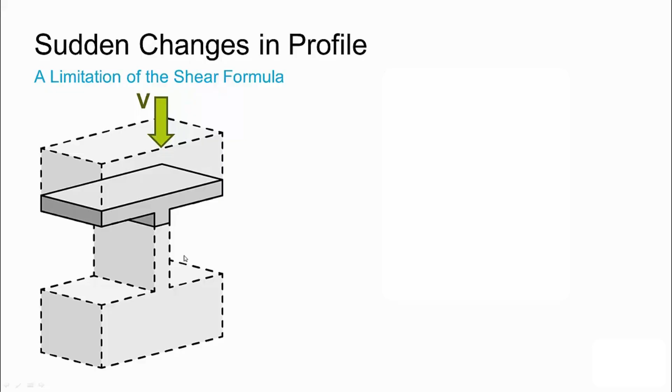If I section away a portion of the flange and a portion of the web and applied our shear formula, we would get that there has to be a uniform shear stress acting in the flange and a uniform shear stress over the small area of the web.

Now the problem occurs when these two faces get close together as we approach this sudden transition. At that sudden transition, this uniform stress distribution here has to change into this more compact, higher magnitude acting over a smaller area. And we know that's not going to happen in some sort of sudden jump. It's not going to just suddenly change from one to the other.

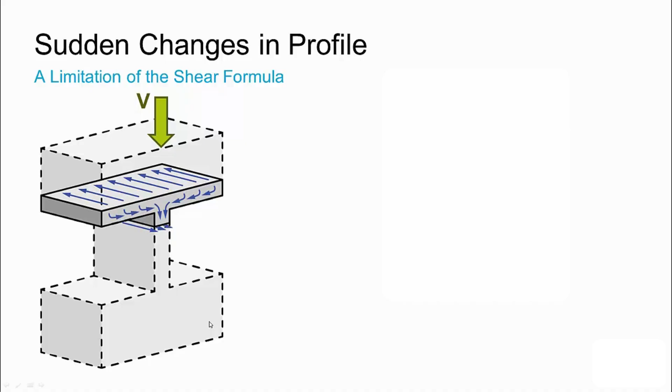Really, stresses tend to flow through a structure, and that boundary condition will influence the stress distribution, and the stresses will begin to flow into that web. This kind of disruption of the stress field that we predict with our equations that assume sort of a well-distributed type of field, we examine this when we introduce the concept of St. Venant's principle, where certain boundary conditions and things can interfere with that sort of well-distributed stress.

Well, that sudden transition is precisely one of those things. So strictly speaking, we should be comfortable with the fact that the shear formula and the stress that it predicts here and here will not be very representative of exactly what happens at that transition.

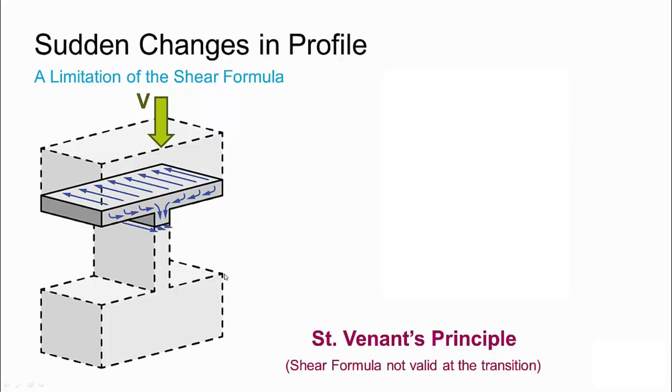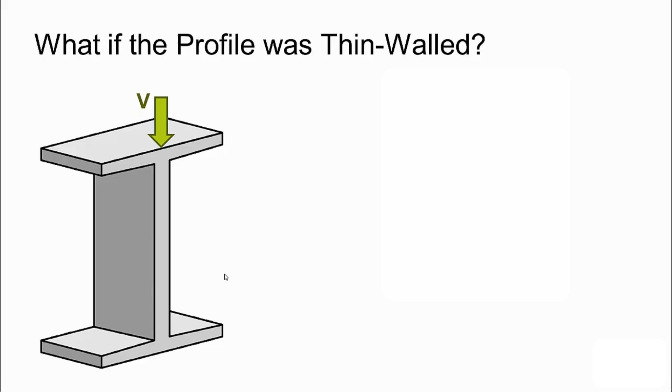So what if this profile was thin-walled? We actually were looking at a similar profile, but it had a very thick flange on it. Well, if you recall what a thin wall means, effectively, if we call something thin-walled, we say that the distribution through the thickness is negligible.

We looked at this in torsion, where we took the shear stress distribution and made it uniform rather than a linear distribution, because we said you could neglect any variation over that very small distance. So that's precisely what we would do for shear in a beam. However, something interesting comes up.

If we look at the top surface of our flange, it is a free surface and the shear stress has to be 0. If we look at the bottom surface of our flange, except in the region where it's connected to the web, but just over here, then our shear stress is also 0 in the vertical direction. That means, using this thin-walled approximation, that the overall shear stress distribution through the thickness of the flange is 0.

Now that seems a little bit counterintuitive, but it's a result of that assumption that we're making. So all that is actually remaining is that horizontal component that we showed in the previous slide. Shear has to redistribute in the horizontal direction.

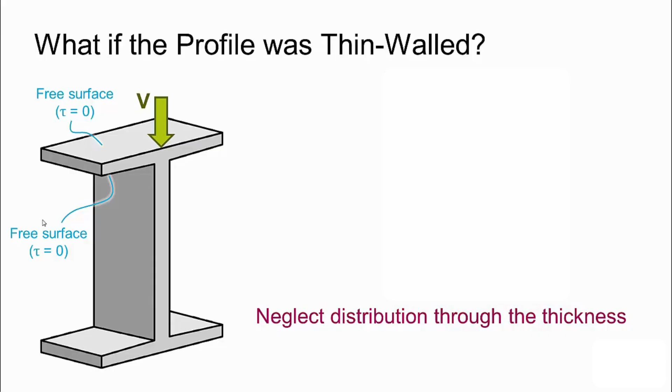So what we get is a shear flow that increases from the outer edges, moves its way into the web, flows down through the web, and then out again through the bottom flange. And this is the shear flow, which we call q, which is just simply thickness times our shear stress.

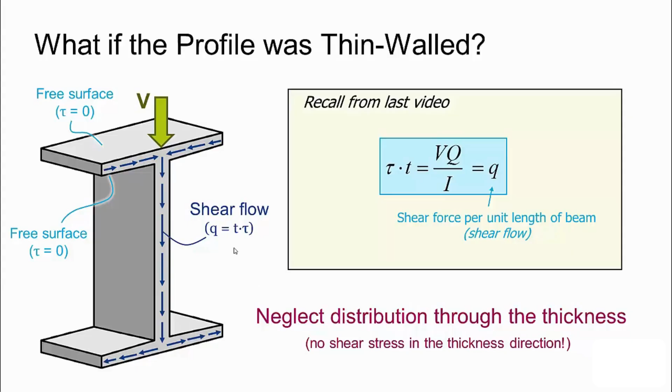Now, if you recall from last video, we actually developed an equation for shear, and we even rearranged it in terms of shear flow and said that the shear flow is VQ over I. So is it really that simple that we can apply the same formula from the previous videos?

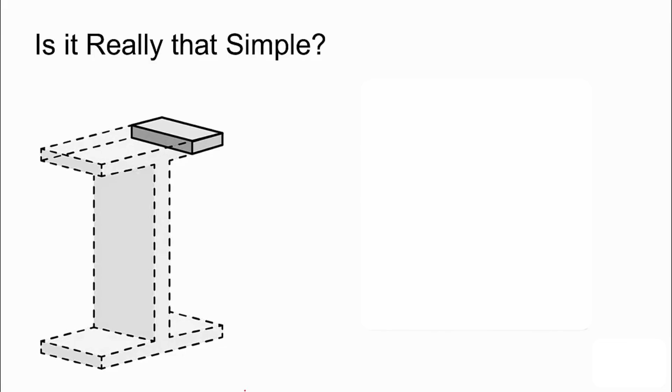Well, let's take a closer look at our beam, and we'll cut away a section of that flange, and we can recall that there will be a bending stress distribution, and it'll actually be sigma here. It's a result of M, and sigma plus d sigma, which is a resultant of the internal moment plus differential moment.

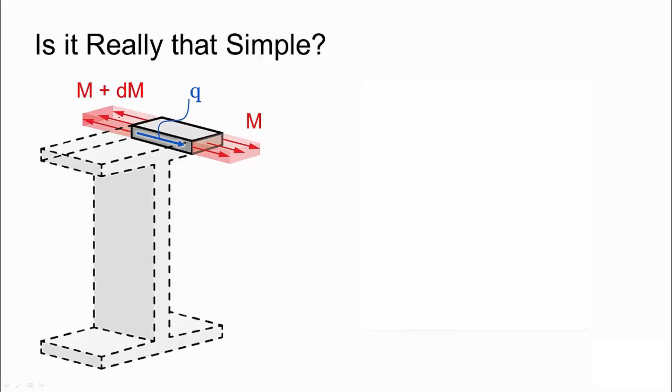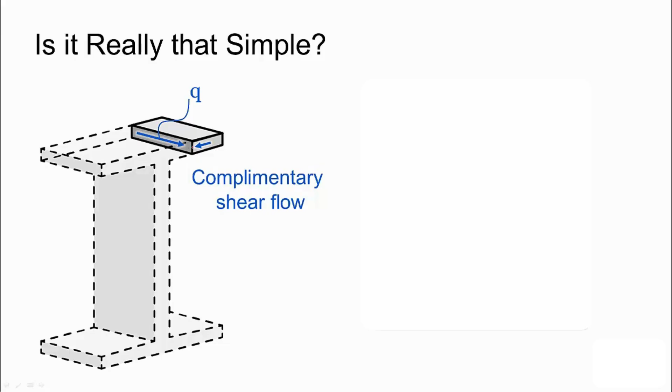Now, as a result of the higher magnitude of the stress here, we will see that an internal shear flow, q, has to develop along this face. And that will balance the equilibrium of these two resultants. And because of the principle of complementary shear, we will have a complementary shear flow acting in the cross-section of our beam as shown here. So yes, it really is that simple.

We can calculate the shear flow, q, with the same formula, VQ over I, where Q is still equal to Y bar prime times A prime, where in this case our neutral axis would be here, this would be A prime, and the centroid of this would define Y bar prime.

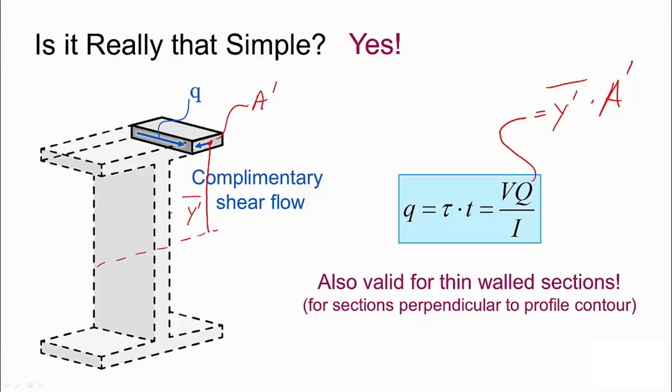So you have to look at it from a slightly different perspective, because now we're doing sections in the vertical direction of the flange here, and then when we get here we start doing sections horizontally. But the same formula, the same mechanics, the same principles do apply.